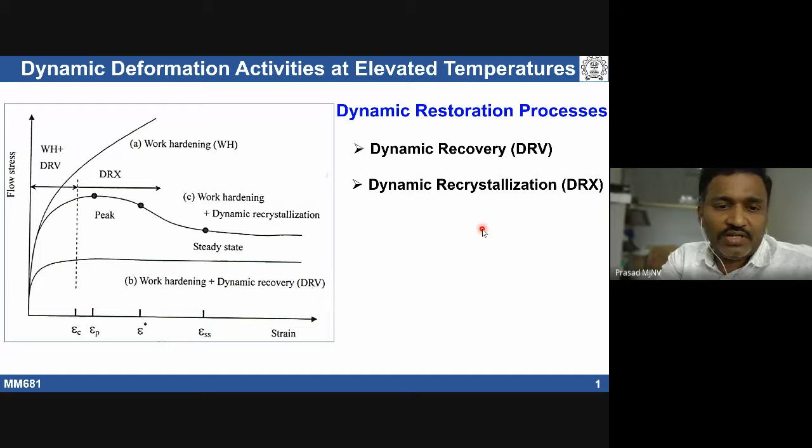Now I think I'm going to cover another topic, that is severe plastic deformation. Then the last lecture on Friday will be on intermetallics, plastic deformation of intermetallics.

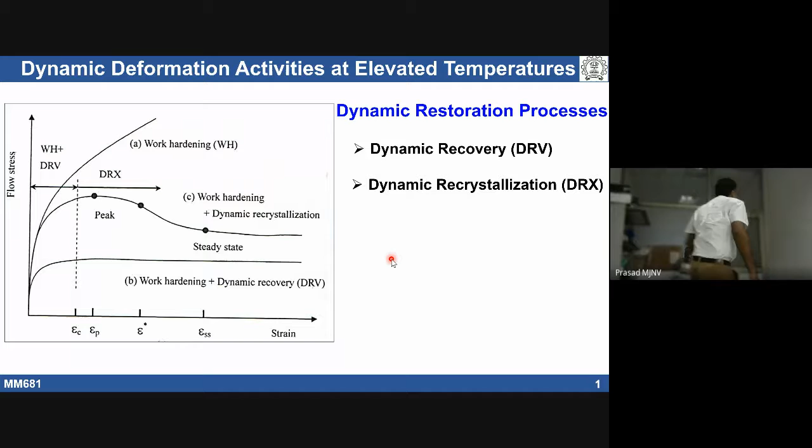Is there disturbance coming from your end? One minute, just... How about now? Hello, is the noise still persisting? A little, hello sir, a little noise is there. Oh no, where is it coming from? Sir, I think it's because of the earphone placement, sir. Earphone placement, okay. So I hope it's better now? Yes sir, still the same noise is coming. It is better now sir.

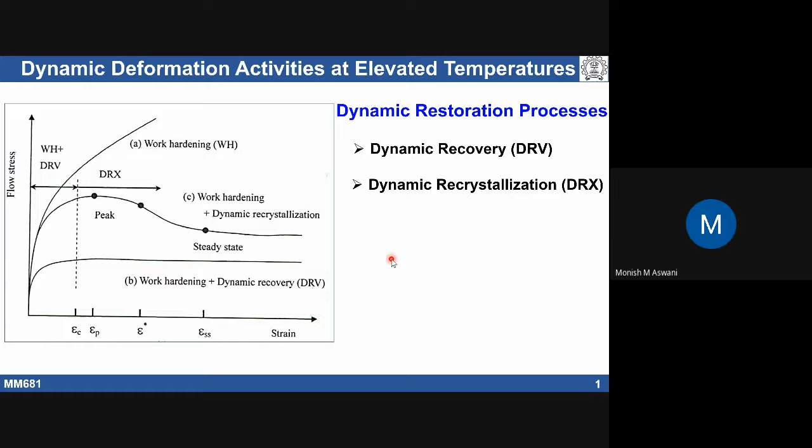Okay fine. So in the previous lecture we discussed dynamic deformation activities, especially restoration processes. The microstructure can get recovered, can undergo recrystallization, which basically restores the strain-free grains. There are two processes which can happen during deformation itself, especially when you deform at high temperatures: dynamic recovery and dynamic recrystallization.

Dynamic recovery is related to annihilation of opposite sign dislocations. If they happen during deformation, that can lead to formation of subgrains, developing a subgrain structure. This is explained by the polygonization mechanism, where dislocations of opposite sign coming together on the same plane can get annihilated, leading to formation of a subgrain structure.

So that's a typical characteristic we see in stress strain curves. Typically the work hardening curve will be like this, which we already discussed. In case of dynamic recovery, the stress strain curve is going to be like a steady state, saturated kind of stress. There, work hardening and dynamic recovery together take place and balance each other, so stress remains constant.

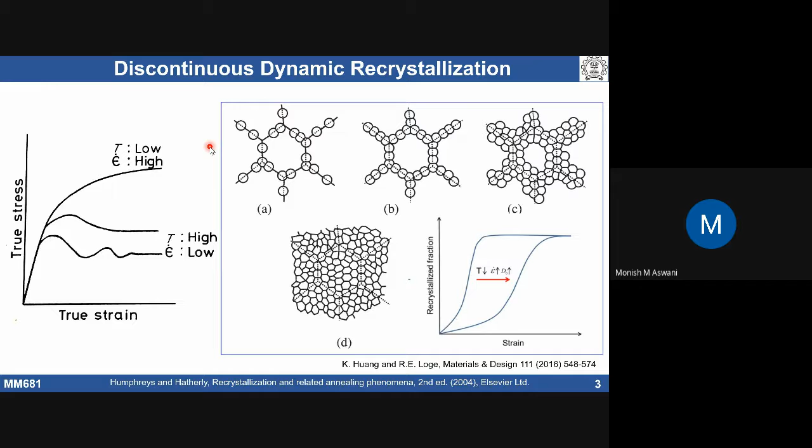Sir, so if DRX typically happens at a higher temperature than DRV, I mean both are high temperature, but DRX happens at a slightly higher temperature than DRV, then in the first graph shouldn't the DRX curve be lower, since higher temperature means lower flow stress?

No, this is a schematic thing, it is not for any material. We didn't specify what materials these are, it's just schematic. It's not for any particular material, because a particular material will not show all of them. If you take aluminum, it will not show all these things; it'll show either this work hardening initially followed by this, or we may see this directly. We do not see this. It's material dependent.

There's no characteristic numbers here, it's just a plot on the y-axis, whether this curve is stress versus strain or that curve is stress versus strain, that's it, nothing to do with actual stress magnitudes here. The magnitudes are not given. This is a schematic representation of typical stress-strain curves, or flow curves, showing a material exhibiting only work hardening, a material exhibiting work hardening plus DRX, and work hardening plus recovery.

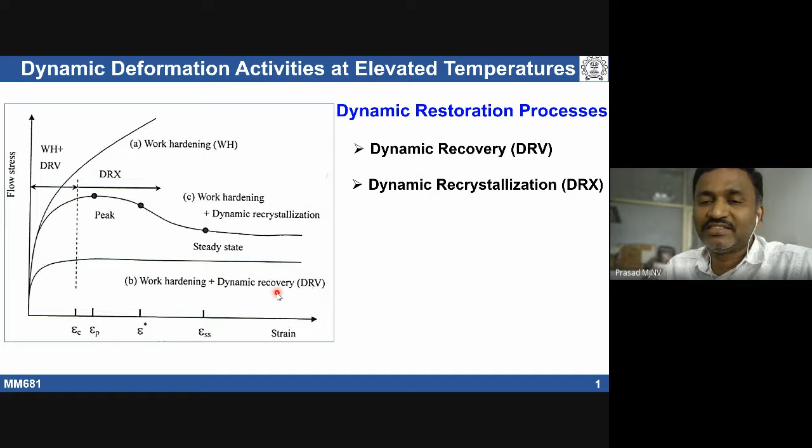Is it clear? Yes, sir. Clear. Okay. Yeah.

So in case of DDRX, typically one characteristic feature is how the stress strain curves look, and microstructurally, formation of this necklace kind of structure is going to form. Strain-free grains form along the boundaries of the deformed grains.

This necklace structure, whenever we see it, marks the onset of recrystallization at some onset strain. At that strain we do see recrystallization happening. If you stop and look at the microstructure, we see formation of this necklace kind of structure, strain-free grains along the boundaries of a deformed grain structure.

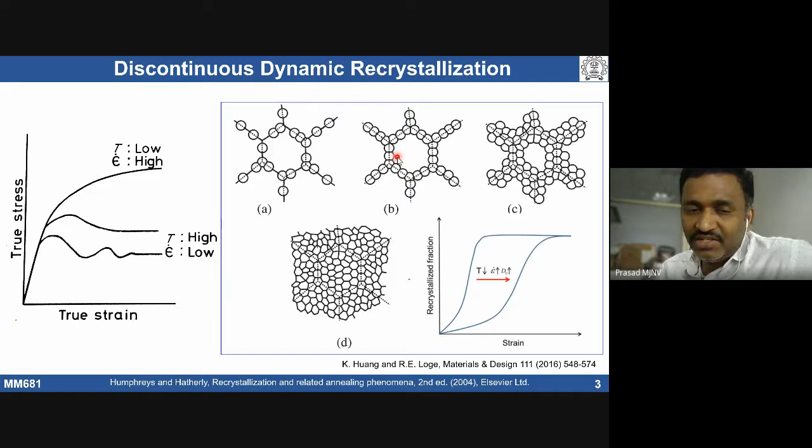This is a characteristic way of saying that the material is undergoing discontinuous dynamic recrystallization. So then we discussed that typically there are three different types of mechanisms people use for explaining how recrystallization takes place in a material.

It can be static or dynamic, or when dynamic, it can be CDRX or DDRX. There are several well-known mechanisms: subgrain formation followed by subgrain boundary migration, subgrain rotation and coalescence, and strain induced boundary migration.

Most of the times when there is DDRX, we do see SIBM is a common mechanism which explains formation of recrystallization in a material during deformation itself.

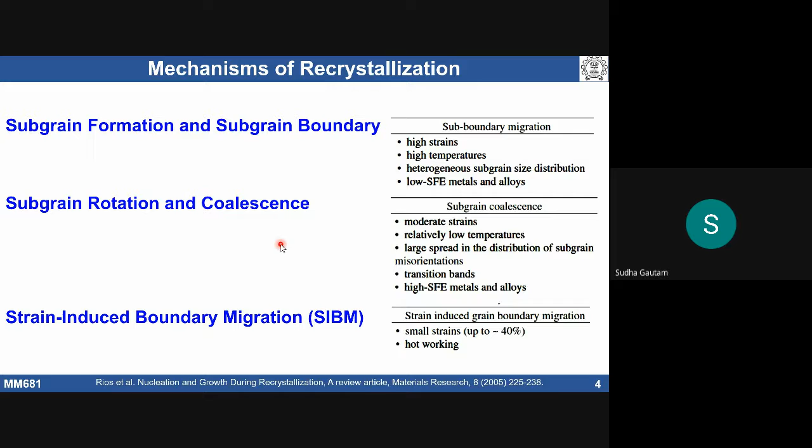Yes, sir. Okay, this is the whole story about dynamic deformation activities at elevated temperatures. So today's topic is on severe plastic deformation.

I hope some of you might be knowing, because during masters or bachelor's days you might have heard about severe plastic deformation. What is its speciality? When do you say the deformation is a severe plastic deformation?

Any idea? I wanted to know how much you already know. Some of you? Strain rate, have you heard? It is very high when we deform the material. Strain rate is not necessarily very high. When do you say the plastic deformation is a severe plastic deformation?

No idea? Have you heard any names under severe plastic deformation? What are different methods available? Equal channel angular pressing - yes. Any more? Friction stir processing. Any more? Torsional pressing or something like that - it's called high pressure torsion. Yes. Even machining per se can also be called severe plastic deformation?

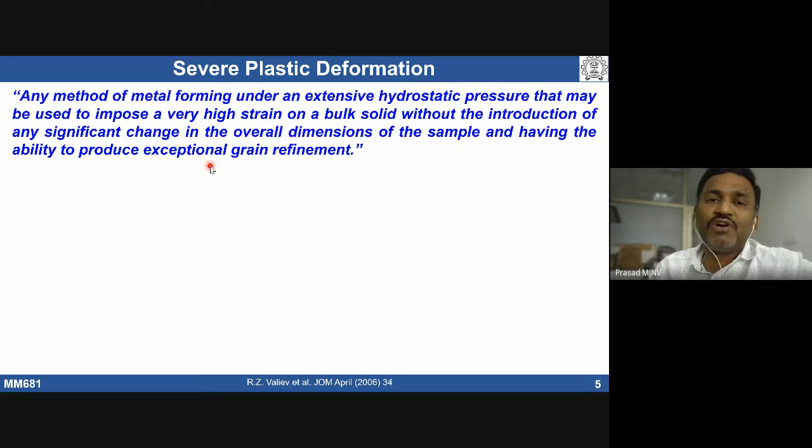Some important methods, the techniques which involve severe plastic deformation. One is based on equal channel angular pressing, ECAP, which is the foremost important technique. It's not the first one, but it's the most important technique that comes under the category of severe plastic deformation. There are n number of variants in equal channel angular pressing, with different stress states developed by people, but the most important is the equal channel angular pressing.

The other techniques are based on using torsion shear under high pressure, HPT, high pressure torsion, and techniques based on pressing and forging, multi-directional forging. There are also techniques based on rolling, accumulative roll bonding, and corrugation and straightening method. There are also combined techniques, where some of these methods can be combined. So the most important things I will discuss are ECAP, high pressure torsion, ARB, RCS and MDF.

These methods will be discussed, and what is the mechanism, how the grain refinement is taking place in the material. So these things will be discussed in today's lecture. Just to recap, this was about the definition of severe plastic deformation.

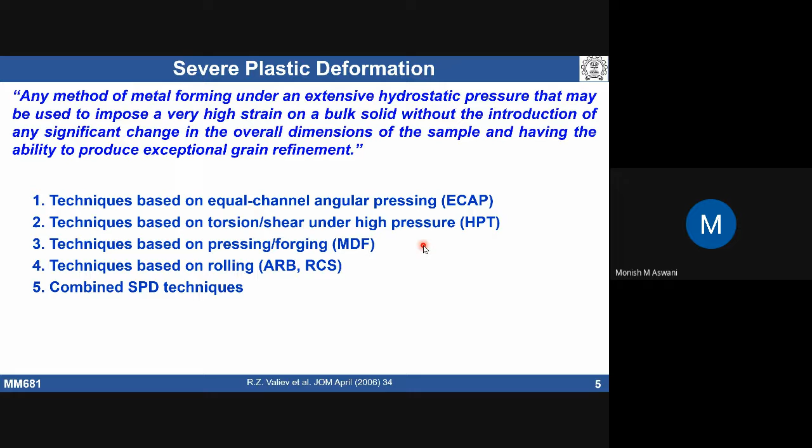A student asks: Sir, I was thinking, no strain, I mean high strain without any shape change, how is that possible? The instructor responds: Yeah, that's the strain, okay, that's what the techniques show. If you look at the techniques, we'll understand.

If you look at ECAP, it will have a die with some cavity, which can be L-shaped or angular. Typically the first one people developed was this kind of L-shaped die. We place the material here, taking a cylindrical or cuboid specimen, and if you apply force with a plunger, it comes out. This is the inlet die channel, and this is the outlet channel. The material comes through, and here the dimensions are the same, the entry and exit dimensions are the same, the cross section is the same. When you press, the material undergoes deformation and comes out with a similar shape.

So this is called equal channel, because both channels are equal in terms of cross sectional area. There is a phi angle and a psi angle that people use, and depending on these angles, the amount of strain induced in the material is going to vary slightly. Depending on how much angle you give, phi and psi, accordingly the strain induced into the material changes.

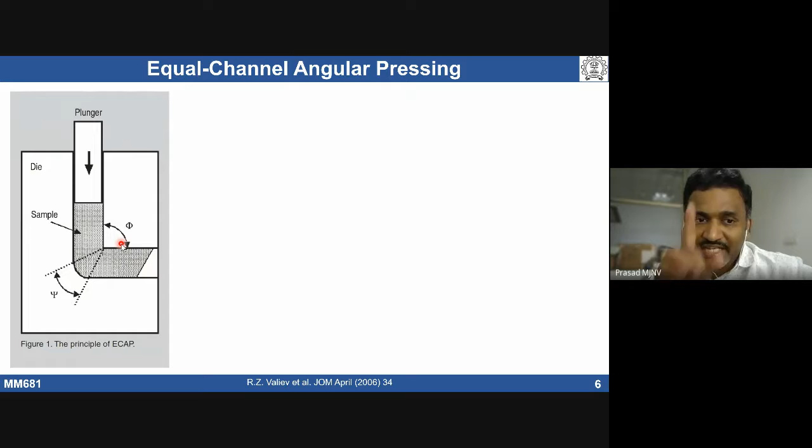Depending on these angles, the total strain in a single pass is estimated using this formula. For example, n is the number of passes, one pass in this case.

Depending on the number of passes you are doing, and the angle used, basically the number of passes and the die angles phi and psi, we get a strain value. Typically around 0.9 to 1 true strain can be induced in a single pass by having this kind of setup.

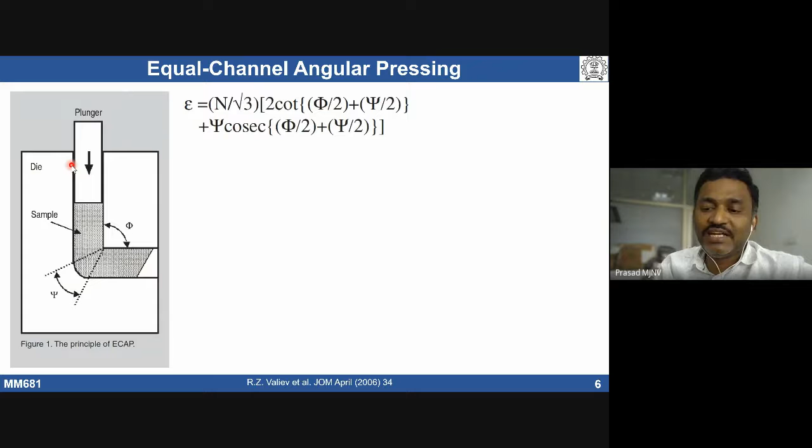Within equal channel angular pressing, there are 4 different variants or methods. Depending on how you press the second time, since there's not much shape change after one pass of a cylindrical specimen, the second pass makes a difference in the method. For example, there's route A, route B (BA and BC), and route C. These are the 4 basic processing routes available in the ECAP method.

Sir, in this process, how are we calculating strain actually? Is it just by using the design of the die dimension? I mean, strain is usually final dimension by initial. So how exactly do we visualize the strain value because the shape is the same? Is it like a shear kind of thing happening?

Yes, this is a shear component. The strain will be based on the shape, some tilt is there. How exactly do we calculate it? No, it's not quantified as tilt, this is not tilt. We don't calculate strain just based on the die design alone, how much strain gets induced into the specimen. But when we say strain is 0.9, what does this mean actually?

If you take a particular plane, we'll come to that, how it basically deforms. Locally, we see the material undergoing shear at each shear plane. We have crystallographic planes. If you take a cubic element, it undergoes that much strain, it's a shear. The shear strain gets converted into effective true strain. If you take a particular plane, how it changes as it moves through this angle, we see a kind of shear activity. That shear component is used to calculate the shear strain a particular representative cubic element undergoes.

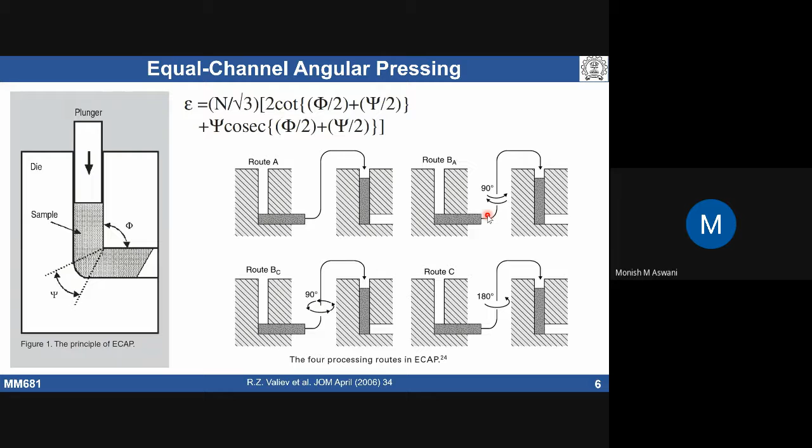Any doubts? In all the routes, we start with the horizontal position of the bar, this specimen. We place it, then it is placed a second time in the same die. After the plunging action, it comes out of the other end, the material comes out from this channel. There is an opening here where the material comes out of this die.

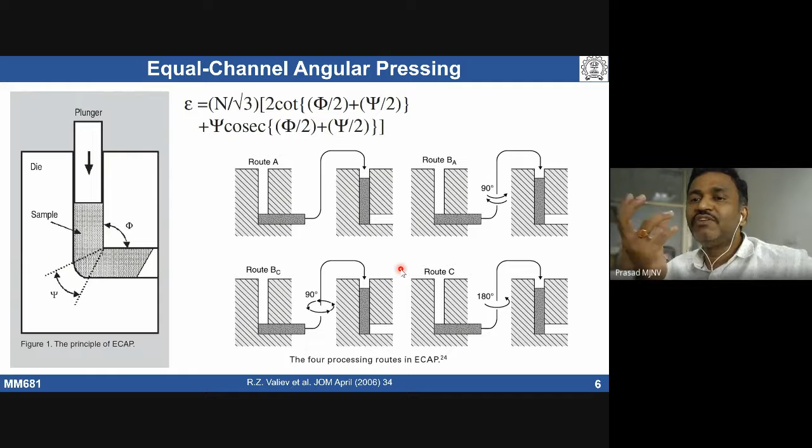Then second time when you put it in the die, what variant are we using? If we put it directly, it's called route A. In route C, we rotate it 180 degrees, placing it in the die. In route BA and route BC, we basically give 90 degree rotation. But in route BA, we give clockwise, anti-clockwise rotation between each pass.

In BC, we rotate the specimen 90 degrees in one particular direction every pass. We are basically doing cross loading of the specimen, changing the loading conditions onto it.

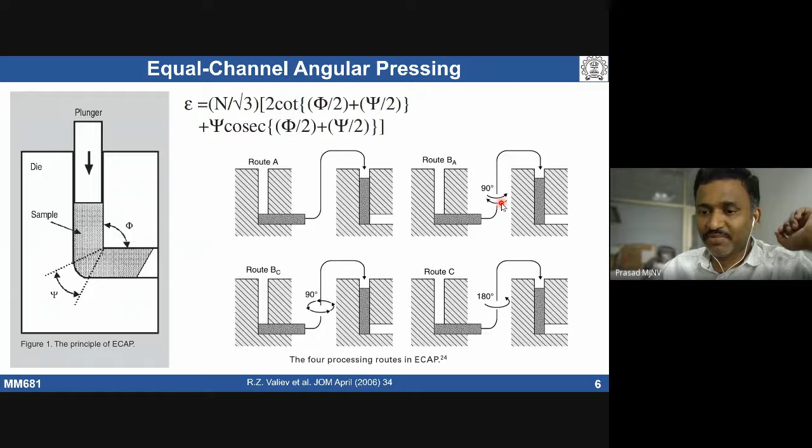If I say equal channel angular pressing, typically we talk about shear deformation. There are two different types of shear we see: pure shear or simple shear, or mixed intermediate shear. What is the difference between pure shear and simple shear? Any idea - are both same or different?

In pure shear, the sample dimension will change, sir. But in simple shear, we do not see such dimension change. If you take a cubic element...

Have you heard - I think these two are different terms, at first it seems the same term. Both are different, sir, both are different.

This is the difference: if I take a cubic or square element, if there is pure shear, there will be a shearing activity, but at the same time we see distortion in both directions, x and y, or alpha and beta directions. Whereas in simple shear, the shear activity happens only in one direction - we don't see this rotation component in simple shear.

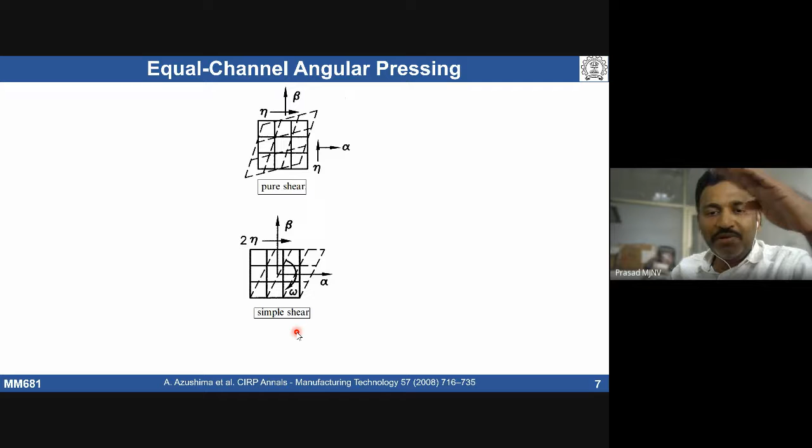So in most of these SPD processes, especially ECAP, we are basically inducing simple shear. If you take a particular plane in the material, take a cubic bar for simplicity, and if I press it, we are going to see this kind of shear activity. It is basically simple shear - most of the time the material undergoes simple shear.

If you take different planes - x, y, z - how does the cubic element undergo deformation in a single pass? A particular element is going to undergo this kind of deformation in a single pass. When you go to second, third, and fourth pass, depending on the route you're using - A, B, BA, BC, or C - for each pass that cube element undergoes shape change like this.

We take route A, take x, y, z, one of the planes. If I take the initial shape as a square cross section, look at how it changes shape for each pass, and it also depends on what route you are using. This is the initial shape, then after the first pass it will be like this, second pass like this, third pass like this, fourth pass like this.

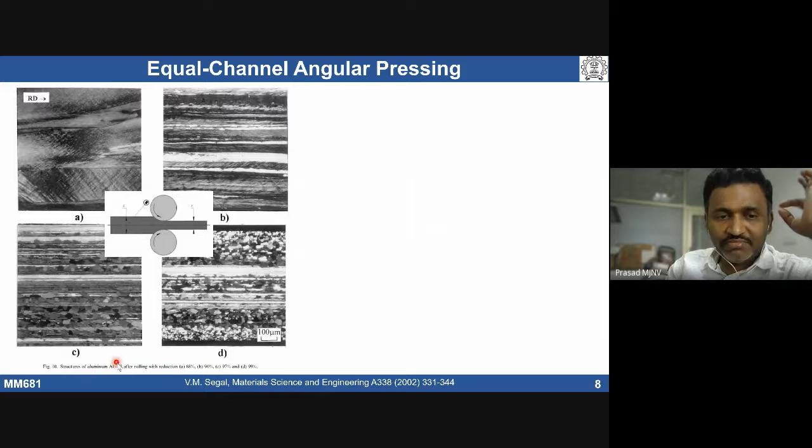If I take a material like aluminum... In the previous slide, there is a shape change, right? Like even in simple shear, there is a shape change. No - finally, the bulk material volume and shape will be the same.

You don't get shape change here. Your bulk volume will get the same shape. Locally, we do see shape change. So whatever cross section you are getting, you will get the same cross section again.

There will be some extra material, some initial cone, that will be cut and trimmed off. Depending on the route, we may see some protruded shape. If you trim that protruded portion, you'll get the same circular cross section again. So we do that process.

We need to trim between each pass - trim the ends. The trims will have some shape change at both ends, but the moment we cut the trims, we'll get the same shape again.

So plunging plus the trimming action is called equal channel angular pressing, right sir? Equal channel angular pressing means equal - this channel and another channel both have the same cross section. That's what is called equal channel angular pressing.

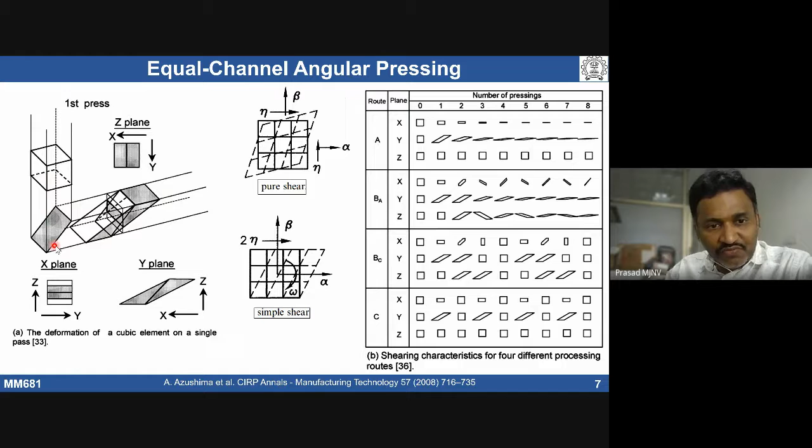We are using a plunger to apply load onto the specimen. When you apply load, the material has to flow. We have some hydrostatic component - we are holding the material. So when you apply force, locally every plane undergoes a shear activity.

Because of shear activity, the first portion and end portions will have some kind of slanting depending on what route you are using. So if you trim those end parts, we'll get again the same cross section area of the specimen. We may lose a small amount of material in this process when you do ECAP.

So the shape could change, but the volume isn't? Sorry, the shape will not change, but can the volume change? No, no, no, volume also will not change. There are no defects developed, because you're trimming off the material - that is your volume, you are cutting. We are losing material at the ends.

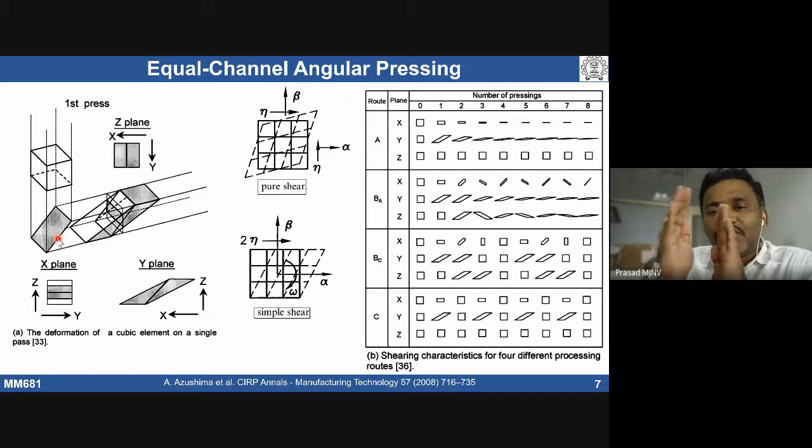So there will be a change in mass also, no? No - because people also do it without trimming. Without trimming, you can also put it when you press it again and it gets pressed up. People prefer trimming because material can get stuck, so that's why they trim. Otherwise you don't need to trim.

You can put it back again - when you put it again, it will get pressed and compressed. So trimming is not mandatory, but it is suggested to trim it because that may avoid clogging in the channels. But if there is no trimming, the shape is going to get changed at the end, right? No - it will change there, but when you put it again, it gets pressed up. The bottom part gets compressed and undergoes the process again. So trimming is not a mandatory step, it is an optional thing.

Okay, but still I didn't understand how the density isn't going to change, because if there is trimming, there'll be mass change, right? Yeah, density - we are losing material. We are going to lose material, but the density of the material is going to be the same. So whatever we lose, along with the mass, there'll also be some volume change maybe. So if you trim, density will be constant. Yeah, this is constant.

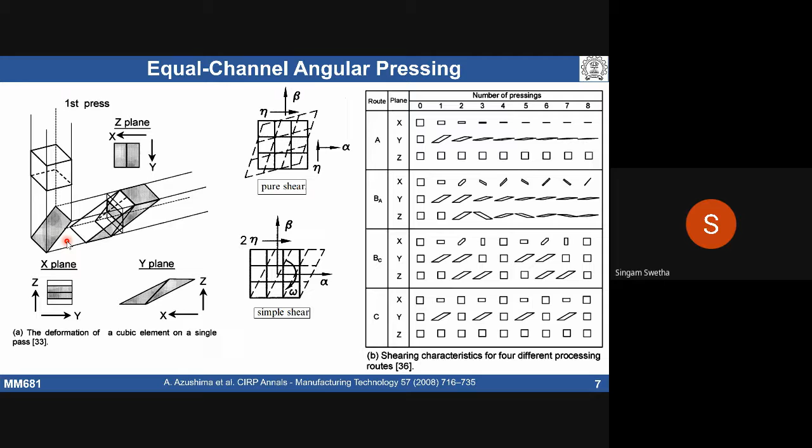Sir, application of strain will be different in both edges - I mean side edges and the other side edges. No, no, the actual strain taking place is at this inter-junction of the two channels.

Then what is the need of changing, I mean rotating the sample? Why are we rotating the sample? We'll come to that. This is why - we are giving a cross loading. We are creating some vortex metal flow. The metal flow is basically changing every time.

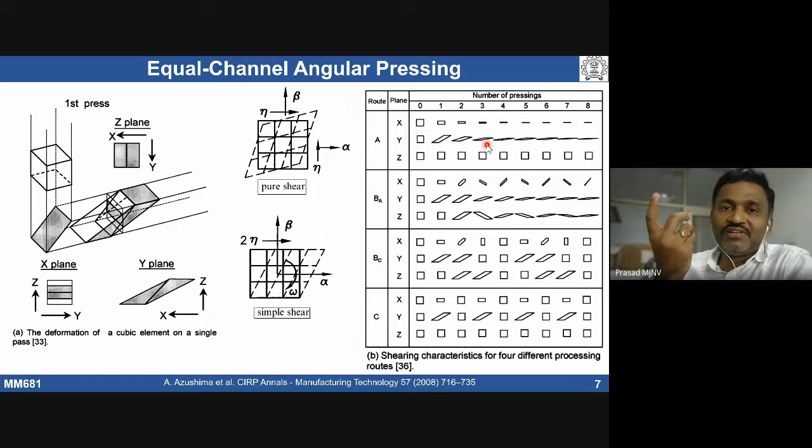If I do not do this, if I take a simple rolling operation, if you take a material and deform an aluminum material by 68%, 90%, 97%, 99%, typically what happens - we do get elongated grains. We may see some subgrain structure, but still, if you deform in one direction uniaxially under rolling, we do get elongated grains.

If I do the same thing using ECAP, what happens? There is a shearing activity happening - the grains are undergoing shearing activity in a single pass, two pass, third pass, fourth pass. What is the difference between these two? Because this one is rolling, the other one is ECAP. Look at the microstructure development.

The microstructure is basically going to have less - almost whatever elongated grain structure we were seeing is not going to be there. We are seeing again an equiaxed microstructure as much as possible. That's basically what we are doing. Once you put it here, after the fourth pass in Route A, we'll get an almost equiaxed grain structure. Initially we started with a coarse grain, about 100 micrometers, whatever - now it became a fine grain.

Here we do see a lot of elongated shear bands - so many deformation bands are going to exist in the deformed, elongated microstructure under uniaxial deformation. Here we are shearing, and because of the shearing activity, we are refining the grain size of the material.

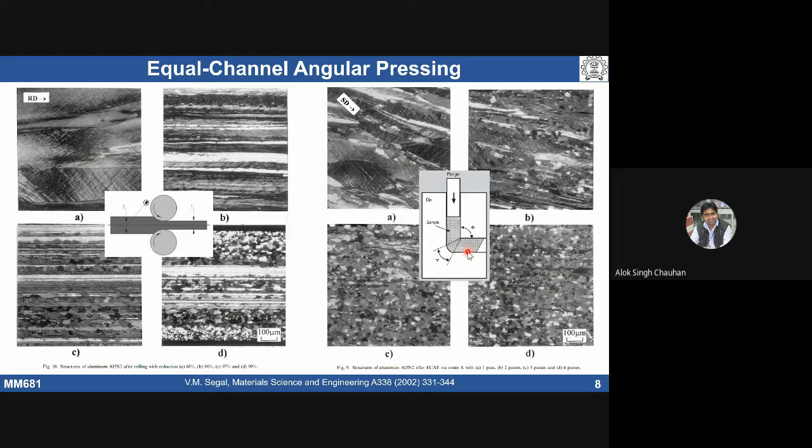One more thing, sir. In the last slide you said that the hydrostatic part of the material is what is giving this vortex flow, is it so? No, no, no. Hydrostatic component can reduce your defect concentration.

When you induce very large amount of strain, a lot of defects can generate, voids can create, so many other defects. But the hydrostatic component, we'll come to that, there's a slide, two slides on what are the basic rules of grain refinement by SPD process.

As such, we do get much dislocation density increase in this process, it increases, it increases a lot. It's strain because we are shearing the component. Locally we do induce a lot of dislocation, that's where the mechanism of grain refinement comes from.

I'll discuss about the grain refinement. It's very simple, how the mechanism basically works, with dislocation generation increasing with strain, dislocations are going to get generated. I'll come to that, we connect it to the mechanism of how the grain refinement is taking place.

Here I'm talking about equal channel angular pressing, how the grain refinement is going to be shown. It's going to be developed when you press the material in this shape. This is the same material we've demonstrated. If I do rolling, if I do equal channel angular pressing, also how the microstructure is going to develop.

Coming to the next one, methods. I'm talking about all methods. Next one is HPT, high pressure torsion. This was the first, I think the oldest. High pressure torsion was the very oldest. Bridgman was the first one who mentioned it, you can apply torsion and apply some compression both. The torsion can give some kind of change in microstructure. That was a thing long back.

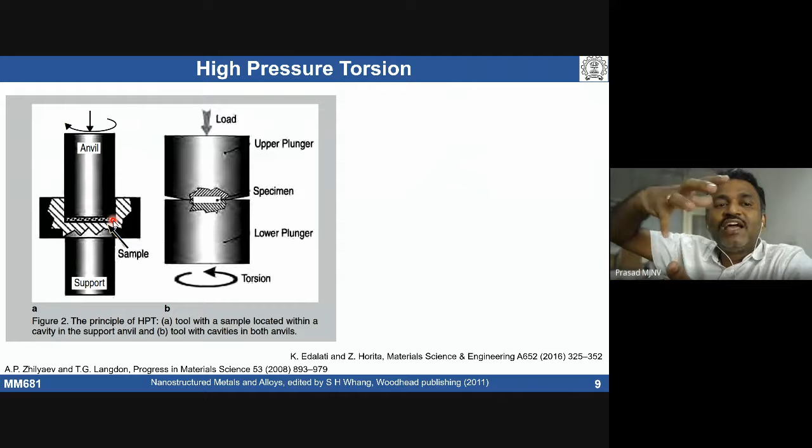Typically some 10 mm, 2 mm thick specimens. When you deform it under torsion with some compression force, there won't be any change in shape of the disc because the disc is constrained within a cavity. We are simply applying force, stress, shear stress to the specimen by torque and compression force.

All of us might be knowing how to determine shear strain and equivalent strain. If you have a disc and apply torsion, the shear strain is basically r theta by h. Theta depends on the rotation, how much rotation you have given, so the number of 2 pi n rotations. That gives you the twist angle and the shear strain at any given location, where r is the radius and h is the thickness or height of the specimen. The equivalent strain can be obtained from the shear strain gamma by root 3.

So when you deform a material under torsion, your strain is going to vary from center to surface or periphery of the disc. Am I right? When you apply a twist to the specimen with some compressive force, what happens? Some strain is going to build up.

The shear strain - initially if you give one small tilt, a small twist, the torque to the specimen, theta is this twist angle, we are going to give some twist angle depending on number of rotations. So r tells that at any given location along the radius of the disc, the strain is going to vary - initially at a low strain, we do see a significant variation.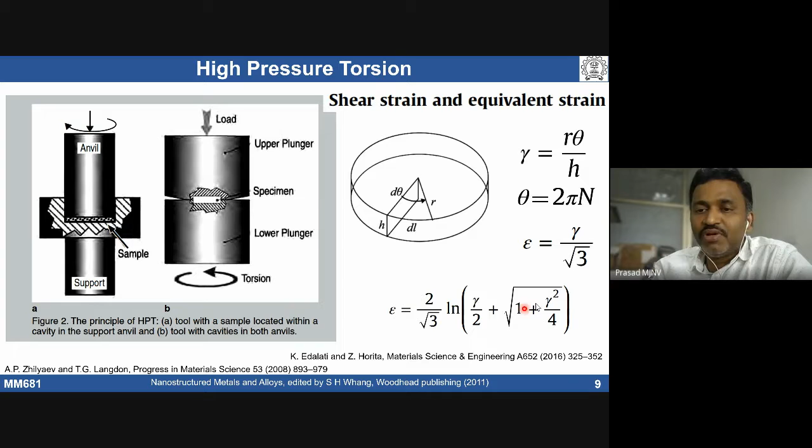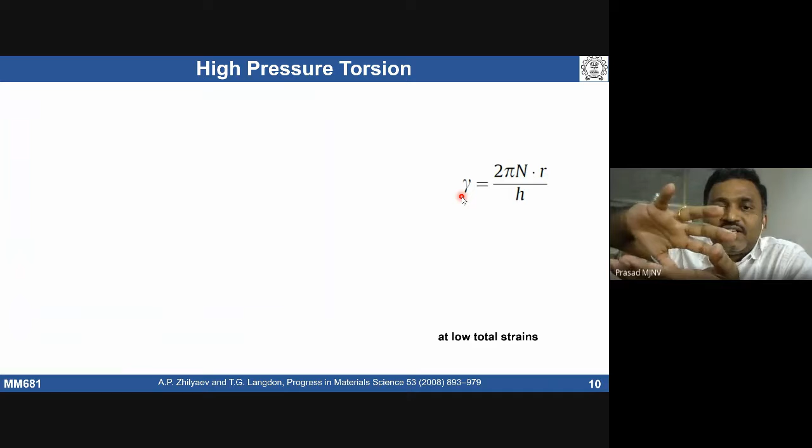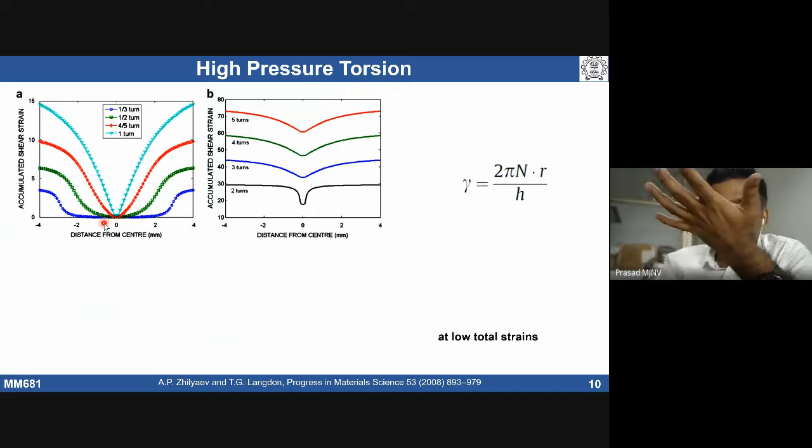We know that 2 pi n r h - theta r h is basically shear strain. If I take the effect of number of turns on shear strain, how much shear strain is getting accumulated - if I take the disc with center at 0 and move towards left or right, that means towards the edge. Take this as about 8 millimeter diameter disc.

So from center, depending on number of turns, if you give one third turn or half turn, one turn, look at here how the strain is getting accumulated. The side edges of the disc will be having higher strain, and once you go towards center, the strain is actually going to be lower, up to one turn. So with increasing turns, we are seeing increased accumulated strain at the edge, and also the accumulated strain is going to be more increased with increasing number of turns.

Beyond 1 turn, if you go for 2 or 3 turns, the accumulated strain is going to be higher, no doubt. The shear strain increases with number of turns, and we see some reduced intensity in the change of accumulated strain between center and surface. Nevertheless, we do see some gradient in the strain from center to surface of the disc under high pressure torsion conditions.

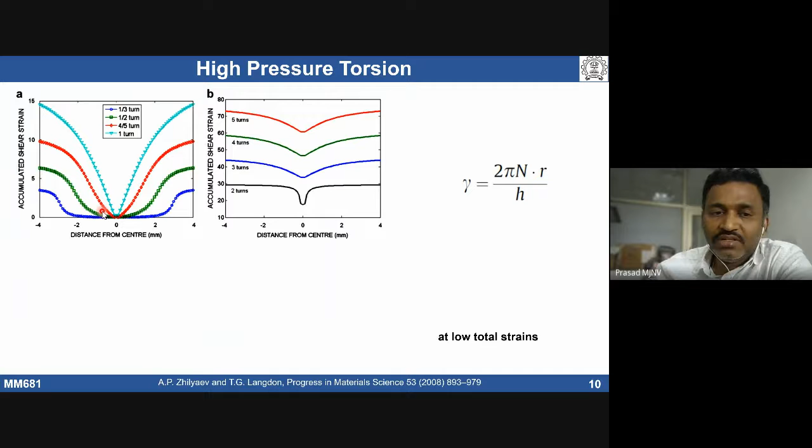Accumulated strain at the edge is different than the center. So because of differences in accumulated shear strain, that can lead to heterogeneity in the microstructure from edge to center of the disc. So one has to apply more and more turns to minimize this heterogeneity as much as possible. So higher turns are required.

We can get a fine, refined grain size, we are getting very fine grain size, but we need to apply very high turns. That means higher the turns, higher the accumulated strain. So we need to give a high accumulated strain.

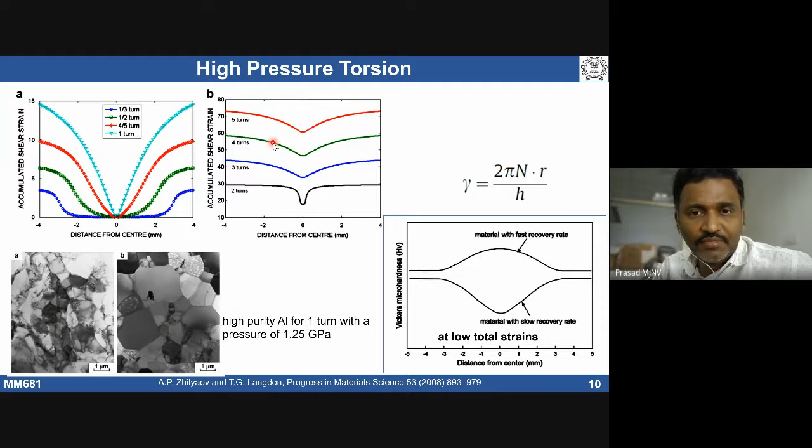Am I online? I guess, I guess I'm online. Okay.

Is it clear about high pressure torsion? We need to apply torque and compressive force together, and the specimen has to be constrained. It has to be constrained, so that the material - even if you do not have constraint, the specimen will not undergo any deformation. We are applying compression at the same time giving it turn, so that can lead to strain in the material.

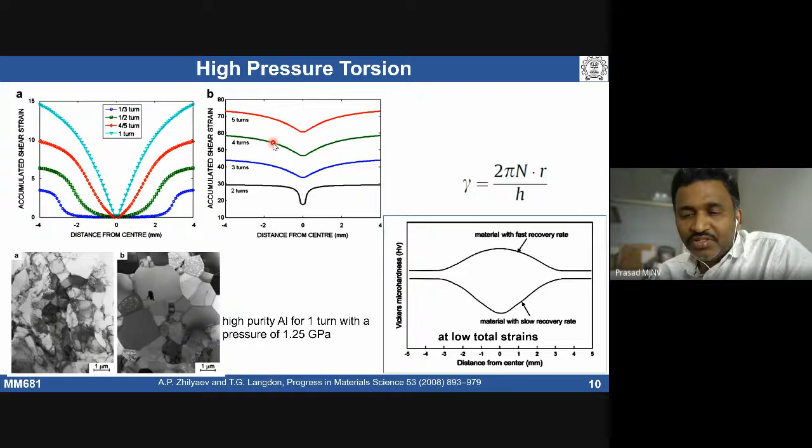Is it clear about high pressure torsion origin? Yes, sir. So, the next one, rolling based technique.

One is accumulative roll bonding. Here we use a simple rolling mill. Take the specimen first, roll it to a certain thickness, then cut it into two parts. Again degrease the material and make it into two parts, then stack it. This is how we subject the material to very large amounts of strain.

Initially, we take the same material in two halves and deform it such that we get a 50% reduction. Then we cut it into two halves and put them back, stacking them together. The stacked piece is again subjected to rolling. So this is like a cycle.

By this method, we can induce fine grain size material, provided there is good bonding characteristics at the interface. If the bonding is not proper, then whatever exercise we do becomes waste. So we cannot use all types of materials, since not all can establish bonding easily under rolling conditions — we need to prepare the specimen properly.

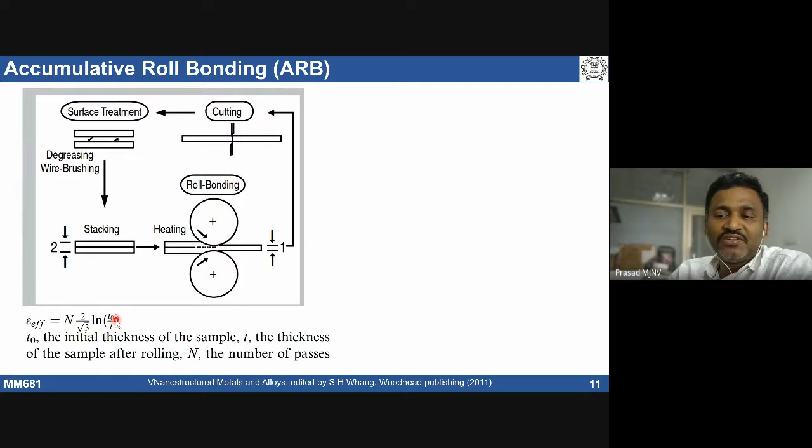There's another technique, repetitive corrugation and straightening, called RCS. Here we take a sheet or plate, typically sheets — most of the time people do only sheets — and we use a kind of shaped roll to deform the material.

We subject it to deformation using two types of grooves — with grooves and without grooves — in this fashion. This is called corrugation, creating a corrugation, and then we repeat the corrugation and straightening.

So this is a technique which is useful where we are not changing the shape of the sheet after the end of one cycle. This together is called one cycle.

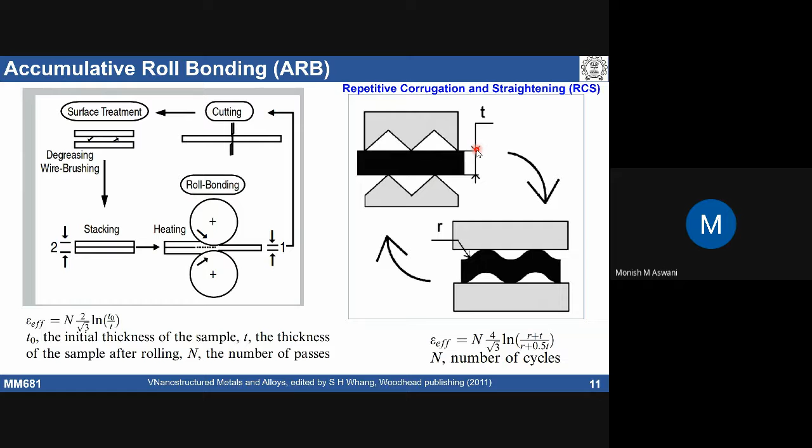Is it clear about this repetitive corrugation straightening method and accumulative roll bonding? Student: Sir, in rolling, how much accuracy can we expect at the completion of the process — will we get the exact shape as before, or will there be some change? Instructor: Yes, we'll get the exact shape.

You have to control this setting, the set limit — 50% reduction, you have to give 50% reduction. Now say you started with 10 mm stacked material, you have to deform it to 5 mm. Make sure only one direction is changing, only the length, there is no change in width. That means a plane strain condition — give a plane strain condition. Most rolling operations can induce plane strain condition; once you give that, whatever change in thickness translates into a change in length.

Yes sir, reducing 50%, then cutting it in two, then putting them back together, two parts again, deform it. So we are basically subjecting the material under rolling conditions; the only additional thing we're doing is stacking. That's why it's called accumulative roll bonding. You have to do it several times, so that it can give fine grain size in the material.

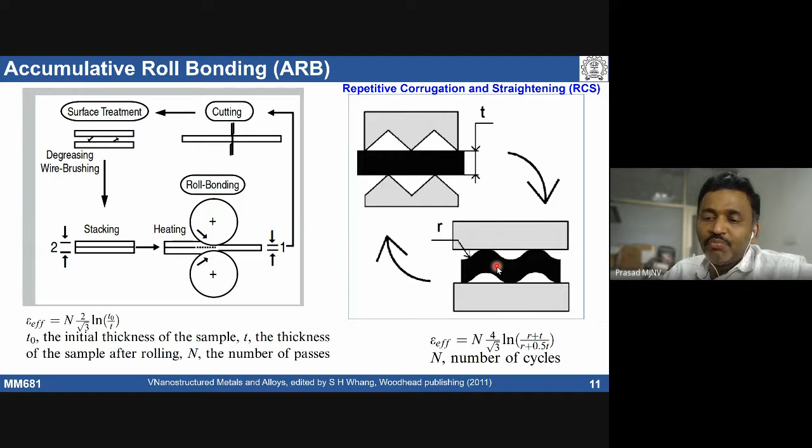Another thing, based on forging, using simple forging equipment, you can also have a method called multi-directional forging. We take a specimen, a cubic specimen, and deform it in height, making sure you have dimensions like 10 mm, 10 mm, 15 mm.

When you deform it in one pass, the 15 mm sample becomes 10 mm. That translates into a dimensional change, with some constraint in one direction, so whatever is deforming translates into another dimension, while the other dimension remains constant. We apply constraint in the other direction using a closed-die kind of forging step.

Again, rotate it 90 degrees and press it - that's called the second pass. This is how people do it, using multiple directions, changing the direction every time, so that we can get the same shape again at the end.

It requires a lot of accuracy - it's not so simple, because we need a proper die which can constrain the flow in one direction and translate deformation from one direction to another. It has to happen properly.

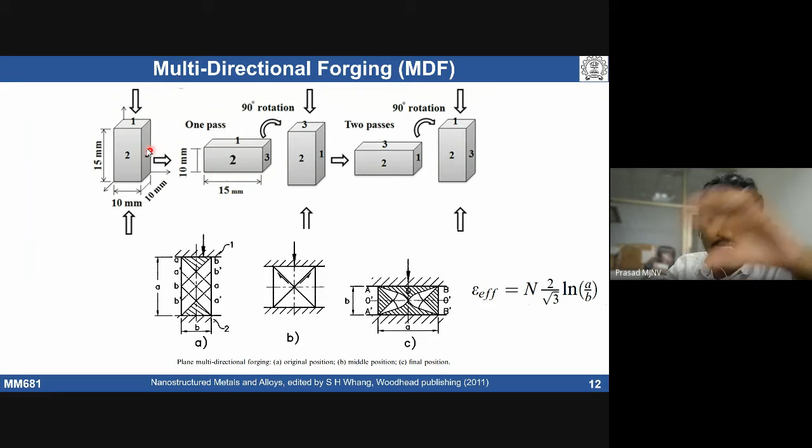It is similar to what you see in rolling. Here too, we use a forging equipment to deform under compression, then rotate it and deform it again, like that. Finally, we make sure the dimensional change takes place properly at each pass.

It's basically a simple compression process. By compressing, we induce a large amount of strain in the material, and rotating it every time changes the path of deformation. This leads to the internal microstructure undergoing such metal flow in all directions that it results in a fine grain size in the material.

There are various methods available - I think people have now developed more than 100 methods under SPD technique. The most important ones I discussed are ECAP, HPT, accumulative roll bonding, RCS, and MDF, multi-directional forging.

If I talk about the mechanism of how grain size is refined, the earliest explanation people gave is that when you deform material to very large strains, a cell structure develops and gets built up in the deformed material.

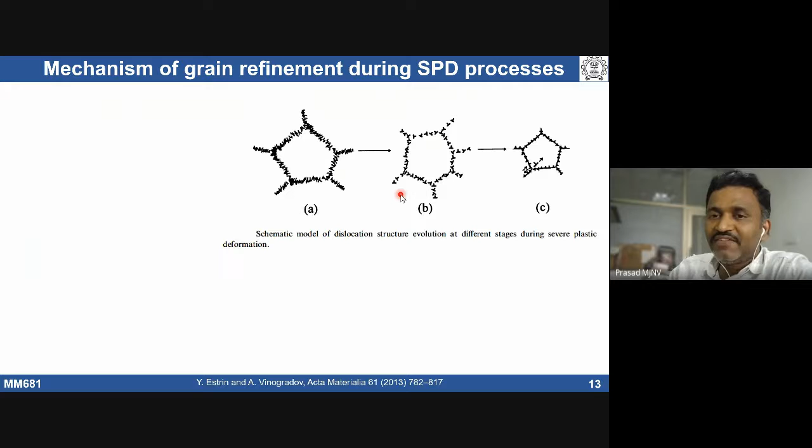The same concept is shown schematically: we develop a lot of dislocations during deformation, with more deformation we see formation of a cell structure, and this cell formation converts into subgrain formation. With more dislocations, these subgrains lead to the formation of a very fine grain structure.

So first dislocation generation has to take place, and those have to be rearranged in the form of cells, and this cell structure converts into subgrains, and these subgrains get reoriented, okay, with further deformation can lead to formation of an ultra fine grain structure. This is one of the established mechanisms for grain refinement during the SPD process.

So there is another thing people also propose: geometric dynamic recrystallization. This is another way people have explained how fine grain size develops with a high angle grain boundary character.

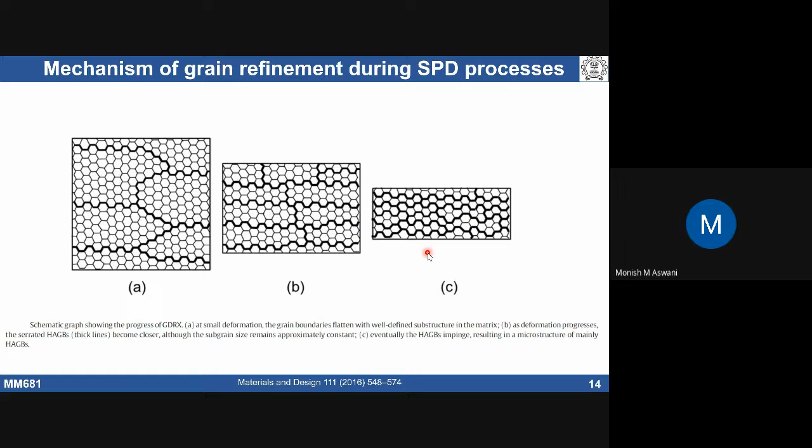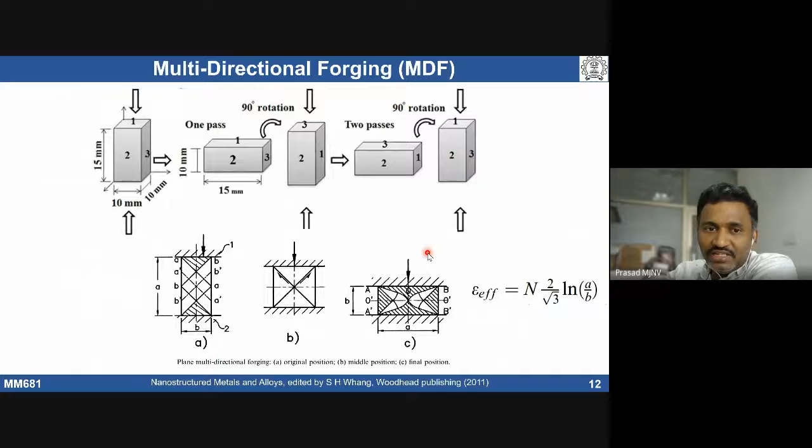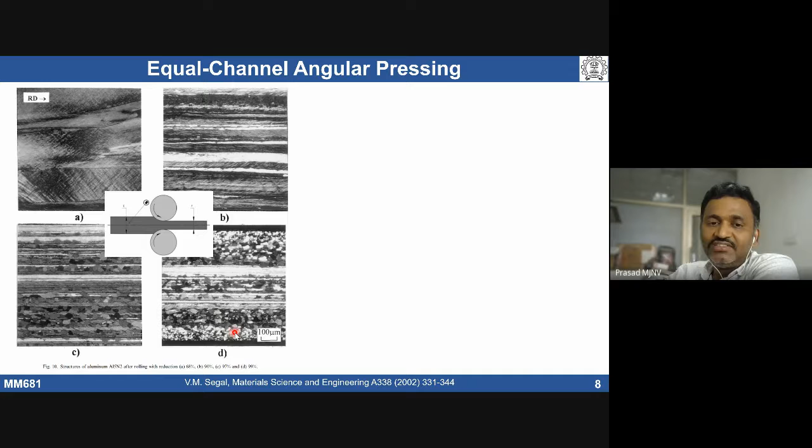Here, see, we do see some very fine grains here in the rolling. Apart from this, elongated grains, we also see some fine grains. Slide number 8, people have explained formation of these grains by GDRX. Is it clear? Yes, sir, it is.

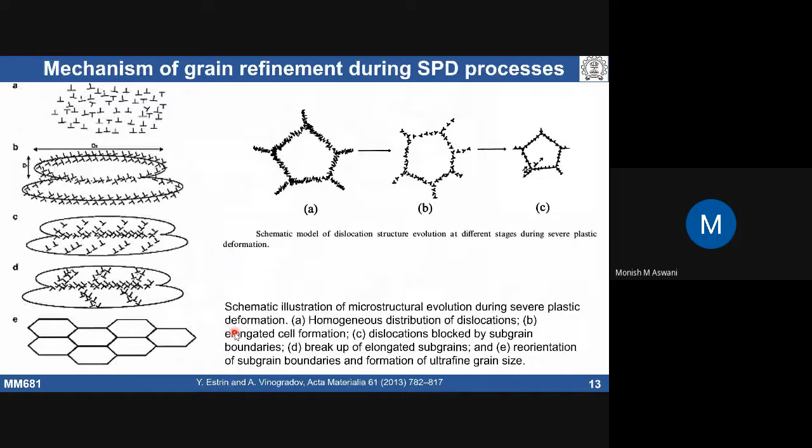This is about the mechanism of grain refinement. There are actually 5 basic rules for grain refinement under the SPD process.

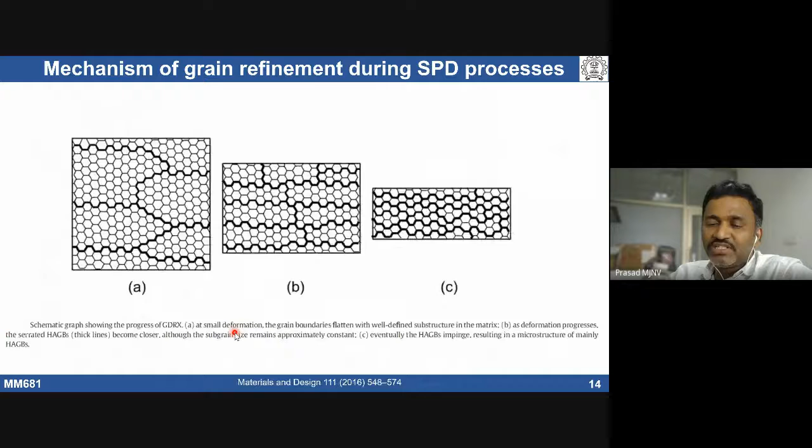The first basic rule: the deformation has to be done below 0.4 times the melting point. The temperature has to be as low as possible. Lower the temperature, better the grain refinement we can get.

Second, apply a very large amount of strain to get a homogenized fine grain size. Third, there should be some hydrostatic component in the process or method used to induce grain refinement. Fourth, stacking fault energy plays a role.

Depending on stacking fault energy, the cell size is going to be different, and accordingly we see a difference in grain refinement. The fifth one is vortex - we have to induce a vorticity of the metal flow.

These points are taken directly from this textbook. These are the 5 important rules in order to refine the grain size without much shape change in the material.

The first one, we need a low temperature - only then can we induce very high dislocation density. If the temperature is high, it undergoes easy recovery, making it not easy to refine the grain size. Though with DRX, DRV taking place, that's a different story.

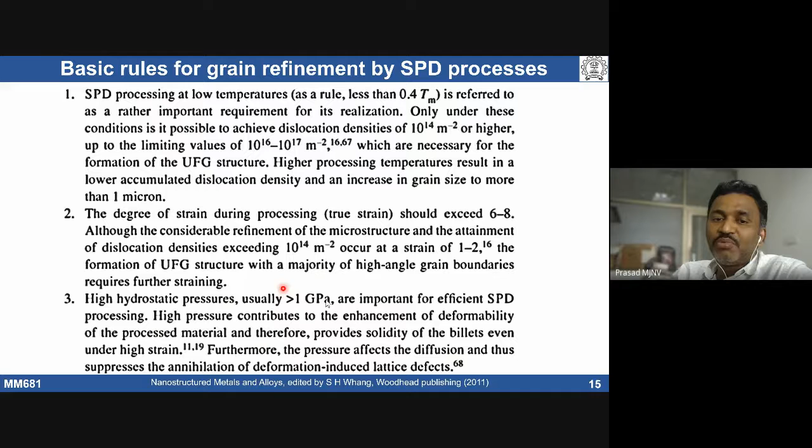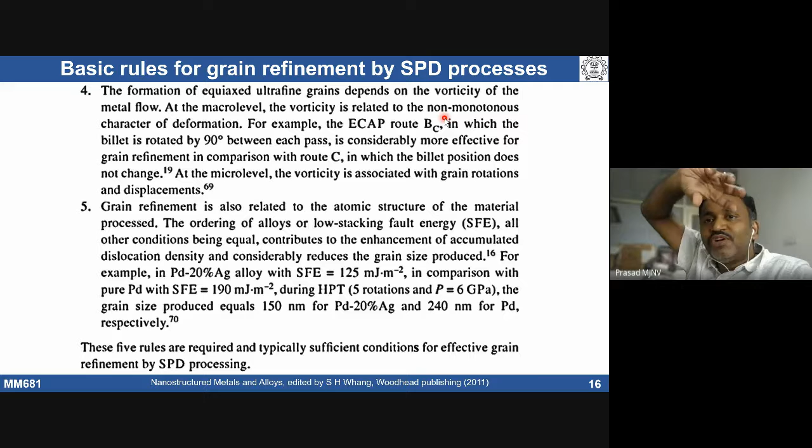Material vorticity - when you do cross loading, when you change the loading direction, that induces a kind of vorticity in the metal flow. This vorticity can induce non-monotonous deformation.

The flow in simple rolling is like monotonous deformation - the microstructure change also happens monotonously in one direction. The moment you change the direction, you are changing the metal flow every time, and that can lead to much more grain refinement.

In case of BC, it's more effective for grain refinement compared to route C and ECAP method, because the shape change is very limited in C - only 180 degrees every time. Here in BC, we are changing 90 degrees every time, giving more vorticity to the metal flow.

The final thing, stacking fault energy - depending on stacking fault energy, the amount of grain refinement is going to be different. If I take aluminum and copper, applying the same amount of strain, everything else the same, which of them is going to have a finer grain size?

Relatively, is it aluminum? Why? See, aluminum I'm talking about as a high stacking fault energy material, and copper is a low stacking fault energy material, relatively between these two. If deformed under the same process - same ECAP, same route, same amount of strain - copper is going to see a much finer grain size compared to aluminum.

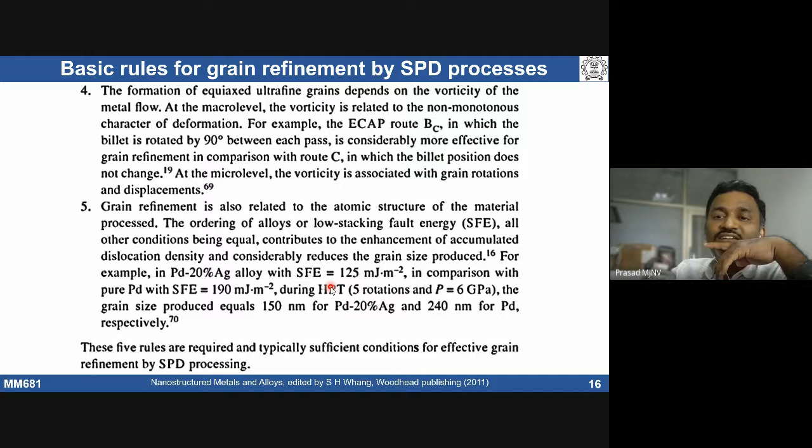The cell size is bigger in aluminum. Sub-cell size and sub-grain size are going to be higher in aluminum compared to copper. So by ECAP, I can get only 1 micrometer grain size in aluminum, whereas in copper I can get down to 200 nanometers very easily, because the cell size is different.

This is because high stacking fault energy materials can recover very fast. The cell size cannot be reduced easily because recovery is already taking place, so you cannot pump in more. We are pumping in dislocations, but they immediately undergo recovery. That's why the cell size is bigger in high stacking fault energy materials. So once your cell size is big, eventually even the finest grains you get are relatively coarse compared to low stacking fault energy materials.

So these are actually important rules one usually applies for the grain refinement taking place by severe plastic deformation.

Many times people also do cryo rolling, or cryo accumulative roll bonding. Cryo means deforming the metal at sub-zero temperature. For aluminum, at room temperature you can get 1 micrometer grain size, but if you want much finer grain, you have to go to sub-zero temperature where recovery can be controlled. If you control the recovery, you can get a finer cell size, which leads to a finer grain size at the end of the SPD process.

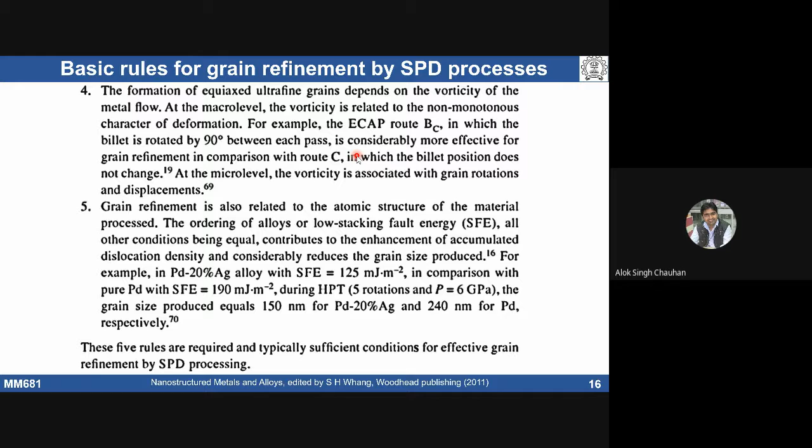Is it clear? Yes. Any doubts here? I think so.

This is a brief coverage because there are now a lot of things evolving in this SPD process. This is from a textbook which has given some summary, but several review articles have come after this textbook, and many textbooks have come on the SPD process.

One of the challenges of the SPD process is scaling up. All these things were demonstrated on lab scale specimens, lab scale samples. Scaling is the biggest issue. I think in Russia there's a lot of effort going into increasing the scalability of this process.

Russia came up with sheets, even big sheets, that can be subjected to ECAP. The only requirement is a bigger, high capacity press. There are limitations because we always have some constraints - if you want to do bigger samples, you need a bigger die which can withstand those pressures, and you need a huge press. So these are the constraints and challenges associated with severe plastic deformation.

People have very nicely demonstrated grain refinement on lab scale samples, but the challenge of scaling up is the major issue with all these SPD processes. So I did not discuss that.

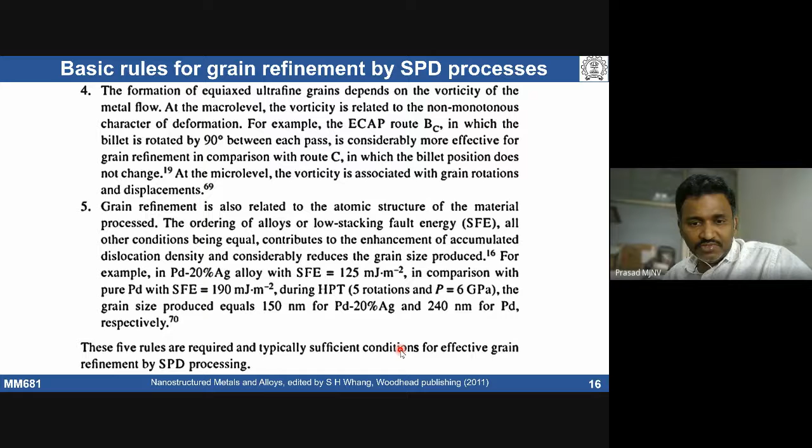Okay, so I think all of you are already saturated towards the end of the semester.

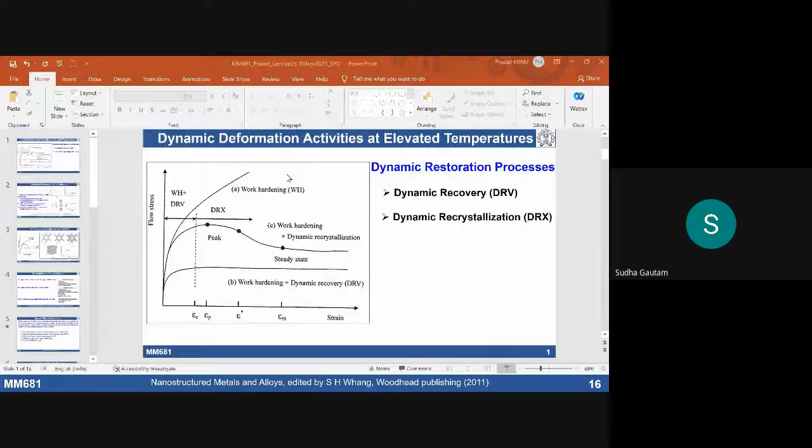In accumulative roll bonding, there is a high chance of delamination, because every material cannot be roll bonded easily. There is a limitation - how do we ensure bonding takes place? Very few materials have been established for accumulative roll bonding. The bonding has to take place under rolling conditions; if there's no roll bond, it delaminates very easily.

Surface preparation is very important. People create a rough surface so that at least there will be a mechanical keying effect. Sometimes metallurgical bonding also develops, depending on the system and materials involved.

If we talk about aluminum, it gets oxidized very easily. Even with proper treatment, it immediately gets oxidized, so you cannot bond it easily - it is difficult. People have shown that for nickel and copper, even at room temperature oxidation is minimal, so they exhibit very good roll bonding characteristics.

Every method will have its challenges. We talked about the general scaling up issue, but even individual methods have certain issues. For roll bonding, interface bonding is more important.

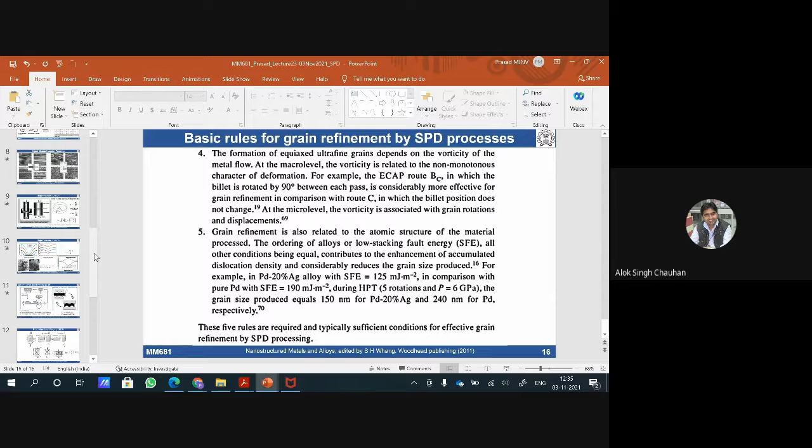So what materials are basically being focused on for ultra fine grain sizes - is it aluminum, or is steel also being targeted? No, all non-ferrous metals - nickel, copper, aluminum, titanium alloys - have been subjected to SPD processes very well. Why non-ferrous only, sir?

Because their strength levels are low, and there are oxidation problems. If you take steel, now people are doing ECAP on stainless steels very easily, but the stress requirement is going to be very high for steels, unlike non-ferrous metals. I need to apply very high hydrostatic pressure for ferrous materials, and the capacity of the press is the major problem. Whatever has been demonstrated has been done very nicely for non-ferrous materials, which require much less load.

People in Russia have done it even for steels, they've shown it, but press capacity is a major problem.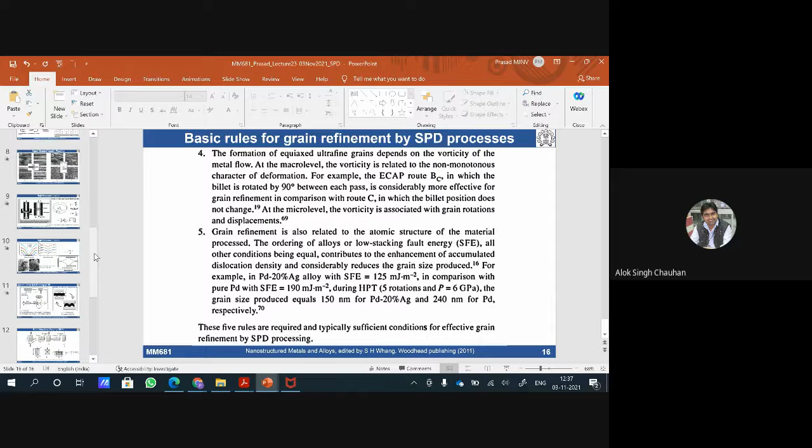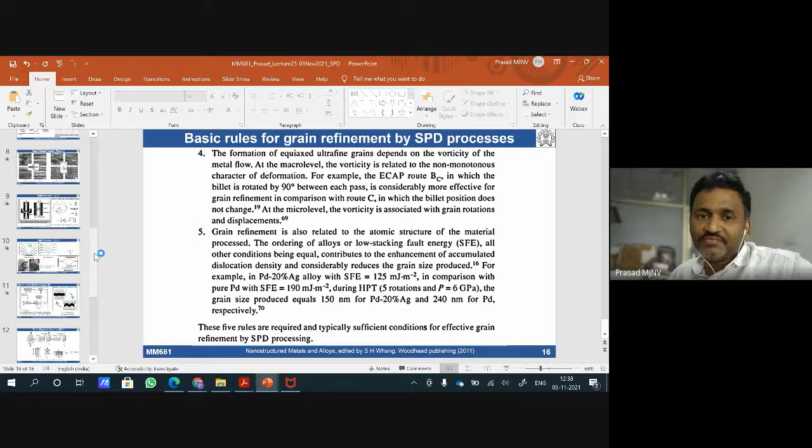This is a top-down approach - all these things are top-down approaches. Fine grains can be obtained by two different routes: top-down approach and bottom-up approach. SPD processes come in the category of top-down approach, where we take an already solid material and refine the microstructure internally.